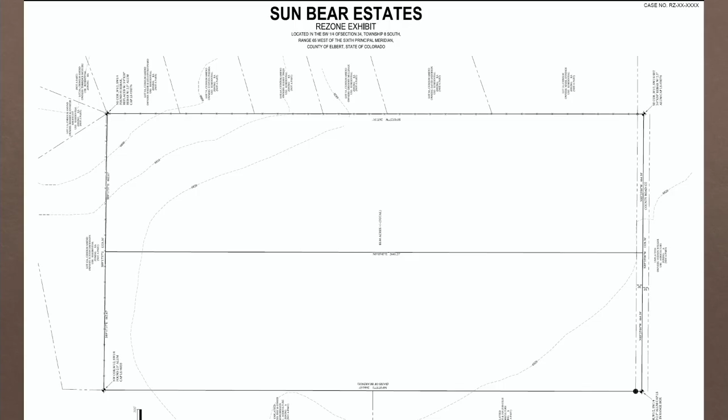So thank you for this one, and I'll move into the final and preliminary plat. Here's a look at the rezone area.

Now we'll dive into the final plat, FP-23-18837, and all of the initial background and details are the same as the previous presentation. Same process. These are occurring concurrently, the final plat and the rezone.

So a few key notes about the final plat. It's a rezone, obviously, from agriculture to residential agriculture. The lots here would be 10-acre lots, 8 10-acre lots. Access will be through a single private road named Imperial Point, located at County Road 122.

The existing land has no structures. The northern lots will have building envelopes because they do not meet the width requirement, so setbacks are basically pushed further back, in simpler terms.

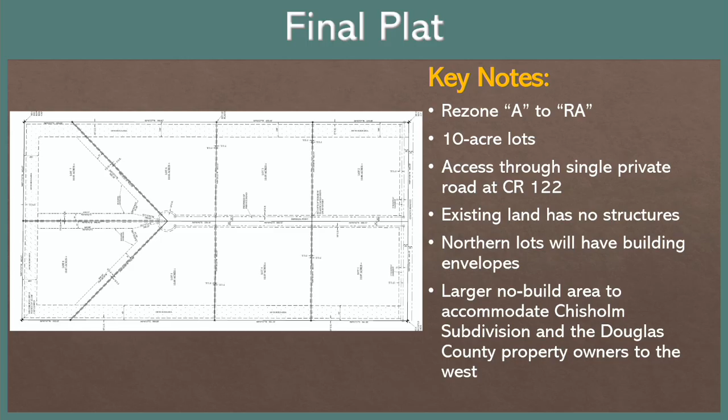And then there are larger no-build areas to accommodate the Chisholm subdivision and the Douglas County property owners to the west. In the Planning Commission meeting, there were some alterations to the final plat made to include a 100-foot buffer on the west side as well to accommodate the Douglas County residents, so buildings will be further from the existing residential and agriculture located in Douglas County as well.

For site access, there's a private road that's approximately 1,550 feet. It'll be 60 feet wide and end at a 100-foot diameter cul-de-sac. There's no ingress, egress on adjacent properties, and additional utility easements for Mountain View Electric are shown.

One provision: local roads leading to a cul-de-sac providing to lots between 1 and 20 acres should not be more than 1,320 feet. And in Article 1 of the enacting clauses, there's a variations and modifications provision that says the BOCC may authorize minor variations and or modifications from these regulations in cases where, due to either exceptional topographical conditions or other conditions peculiar to the site, an unnecessary hardship would be placed on the applicant.

Such variations or modifications shall not be granted if they are detrimental to the public good. And the conditions of any variation or modification shall be stated in writing in the meeting minutes of the Board of County Commissioners meeting. For this road length, going slightly longer at 1,550 versus 1,320, we got with the county engineer, road and bridge, and there were no objections to the slight variation in length for this subdivision.

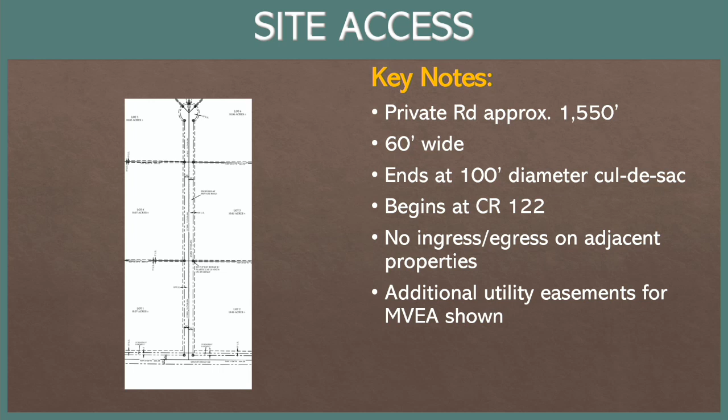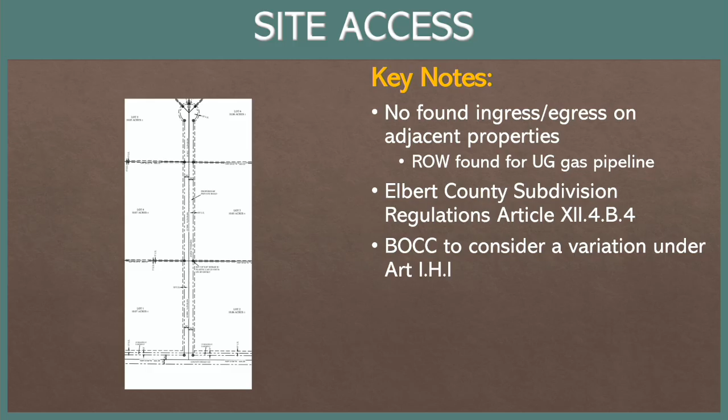So one note or condition would be for the Board of County Commissioners to consider a variation under Article 1H for a variation in road length. This also went through all the same referral agencies and acknowledged all questions or objections throughout the referral process.

So for final plats, Elbert County subdivision regulations list criteria for subdivision requests. So A, whether the subdivider has provided evidence for water supply that is sufficient and quality in accordance to applicable state laws. So the water source was deemed adequate by the Division of Water Resources. They received all approvals needed for the 8 proposed lots, and the Division of Water Resources indicated after the augmentation plan approval that the water supply was adequate.

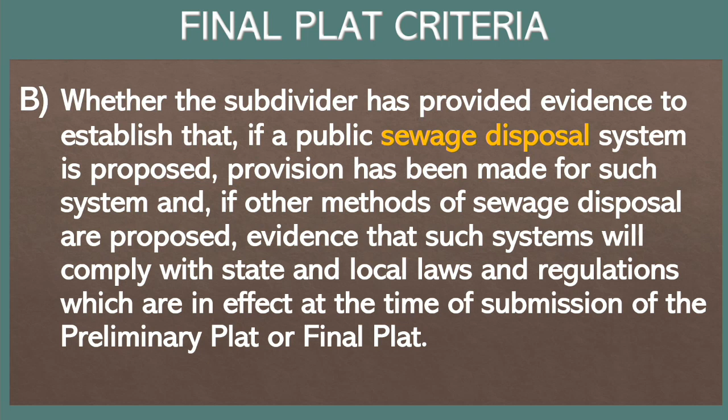And would not provide injury based on Elbert County Subdivision Regulations' 300-year water requirement. B, whether the subdivider has provided evidence to establish that public sewage disposal system is adequate for the preliminary and final plat. There is no central sewer system for this subdivision. Each individual lot will need on-site wastewater treatment systems or other recommended systems approved by Elbert County Public Health at the time of development. They'll need to submit the soil testing and go through the normal process for that.

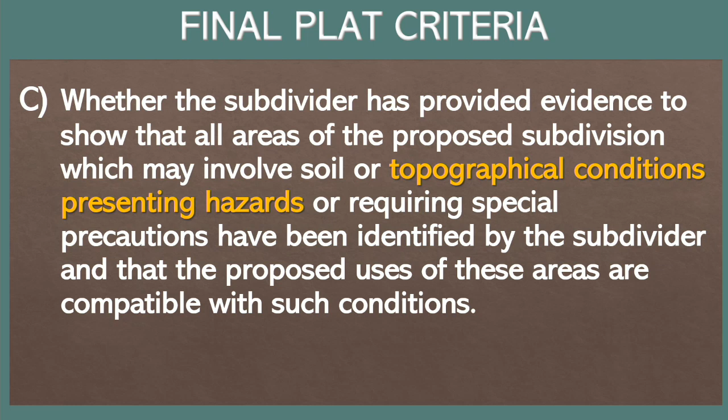C, whether the subdivider has provided evidence to show that all areas of the proposed subdivision which may involve soil or topographical conditions presenting hazards or requiring special precautions have been identified by the subdivider. The applicant provided all this information. Soil testing, of course, will be needed for sanitation approvals at the time of development for each lot.

And then finally, D, whether the application is following the requirements. The applicant has adequately addressed all concerns, and this application adheres to the zoning regulations and subdivision regulations. The only standard of concern regarding the roadway length is presented in this report for consideration and will be up for consideration by the Board of County Commissioners.

And for the comprehensive plan, E, the final criteria: one goal is for water, sewer, and waste disposal. New development shall conform to state laws covering domestic water supply and septic systems. And another goal in the comprehensive plan is that the county should coordinate planning and development review efforts with towns and applicable referral agencies to ensure integration and continuity. This was referred to Douglas County, and they had no objections either.

And then finally, for the natural resources topic area in our comprehensive plan, new development should minimize negative impacts to adjacent agricultural lands and designated open space. This will be subject to cash in lieu of open space to satisfy that requirement, and the applicant was even working on a dark sky provision to minimize their impact on surrounding agriculture and their neighbors.

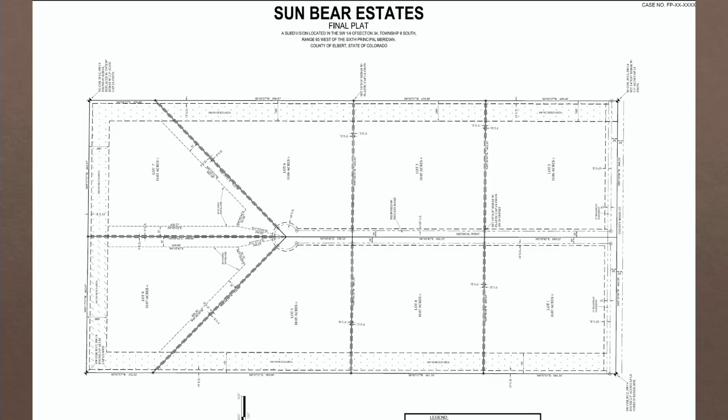Thank you, Commissioner. Thanks, Danny, for the presentation. I first want to introduce our team with Sun Bear Estates that we have today: Steve McAnally with IPA Development, owner and applicant, and Chris Cummins, private counsel.

Danny gave a great overview. I think the most important thing to mention again would be compatibility with the existing development north and east of the property—it's going to be zoned the same. We chose the zoning RA based on feedback we received at the community meeting. We also have buffers, as Danny mentioned, to accommodate the neighbors and their existing views of Pikes Peak, and additional buffers were requested from Douglas County residents, so we added those.

One item to add that was not mentioned is we did dedicate 15 feet to Elbert County for future roadway improvements south of the property, just north of County Road 122, which is a major collector in Elbert County's transportation plan. Danny did mention that this is going to be a dark sky community—these are requirements we're going to impose upon ourselves and the CC&Rs to mitigate light pollution.

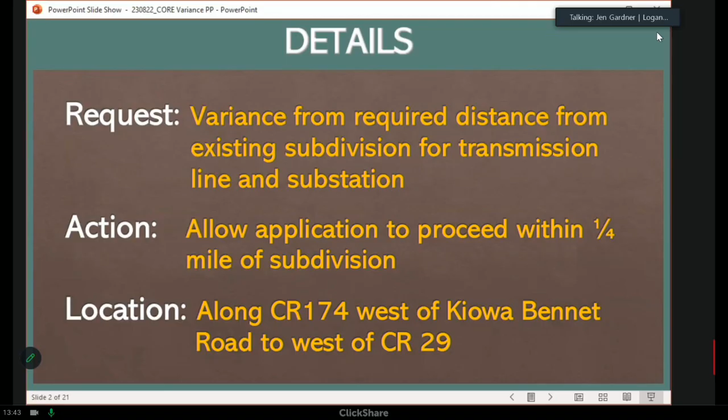The applicant is Core Electric Cooperative. There are multiple property owners involved in this long stretch of transmission line and substations. The application was submitted on June 19th of 2023. We went through a review process and a referral process, and we are here at this hearing today, August 23rd, 2023. The project was noticed in compliance with the zoning and subdivision regulations.

Just to highlight this encroachment that we are here for today, as you can see, the green is the subdivision buffered out a quarter mile. So that's showing distance a quarter mile from the existing subdivision, which, as you can see, overlaps with the Spring Valley substation. We asked the applicant to also add the black dashed line to show the impact of that substation in reverse, so we can see which parcels of that subdivision are actually affected by the quarter mile location.

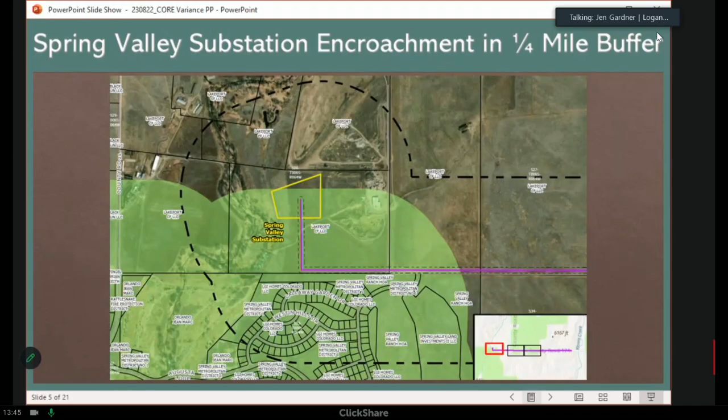Now, as you can see, the transmission line running along County Road 174 is that magenta or pink line. It is proposed to be located along the County Road 174 corridor on the south side of the road until you get to just west of County Road 29, where it will jump to the north side of the road. Again, you can see in green the area that's within a quarter mile of the subdivision, and the black dashed line is the quarter mile from the transmission line. So you can see these 6 residential parcels are affected.

Similarly, running a little bit further east down the road, we've got about, I believe, 13 residential lots in the Sun Country Meadows subdivision that would be affected by this quarter mile location.

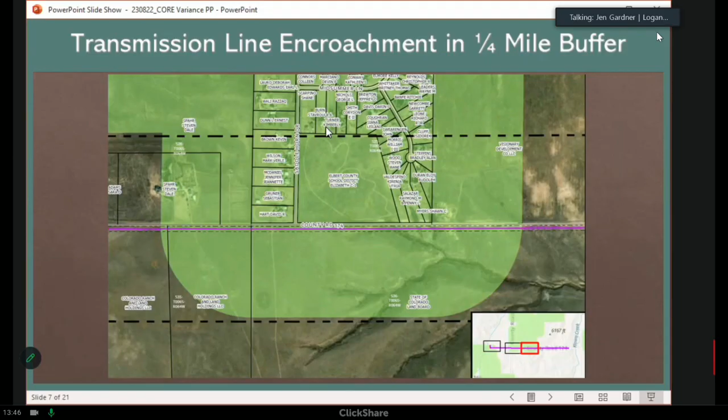As I stated earlier, this was sent out for referral per the zoning regulations requirements. We did hear back from 4 of the referral agencies. Colorado Parks and Wildlife sent a letter stating that the substation itself will cause some wildlife fragmentation, so wildlife moving through that area will now have to circulate around the substation. But they had no specific concerns with the application; they just wanted to make note of that and ensure the applicant was considering it in siting the substation, which they agreed they had been. Colorado Division of Water Resources, Rattlesnake Fire Protection District, and Elbert County Assessor's Office all reported back with no comments and no objection.

I'm going to run through the review criteria. As you're considering this application today, you'll want to consider the review criteria in the zoning regulations, Article 3J7, review criteria A through E.

Review criteria A states that by reason of exceptional narrowness, shallowness, or shape of a specific piece of property, topographic conditions, or other extraordinary and exceptional situation or condition of the property, the strict application of the regulation would result in peculiar and undue practical difficulties for, or peculiar and unnecessary hardship on, the owner of the property. The applicant reports that exceptional conditions exist due to the extent of the existing subdivisions in the area that the project is designed to serve.

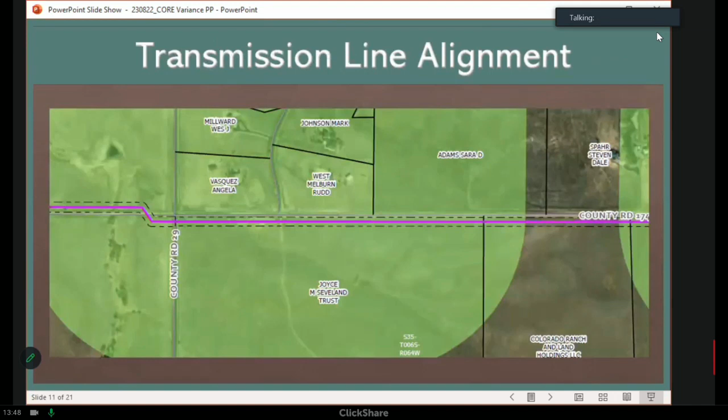Just wanted to show that alignment again. Item B: the extraordinary and exceptional situation or condition on the property stated as the reason for the proposed variance is not self-imposed. The applicant has stated that the project is necessary to provide additional electric capacity to existing and proposed development in the area of the project. So the conditions requiring this variance are not self-imposed.

Item C: the proposed variance complies with the purpose and intent of the standard to be varied and generally observes the spirit of the zoning regulations. The project has been sited to minimize overall impact by locating the transmission line in an existing road corridor and setting the substation back from County Road 174 to reduce visual impact.

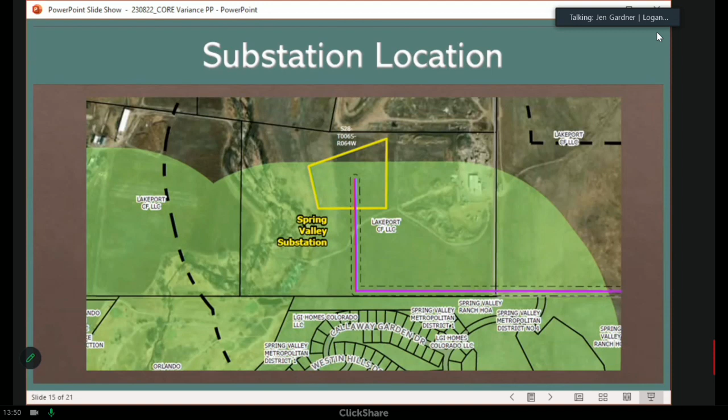I wanted to highlight, this is in the applicant's packet, that they have been working with the potential developer of this site. There is a potential development in this general location that they've been working with to accommodate this substation in conjunction with some other potential commercial and residential development.

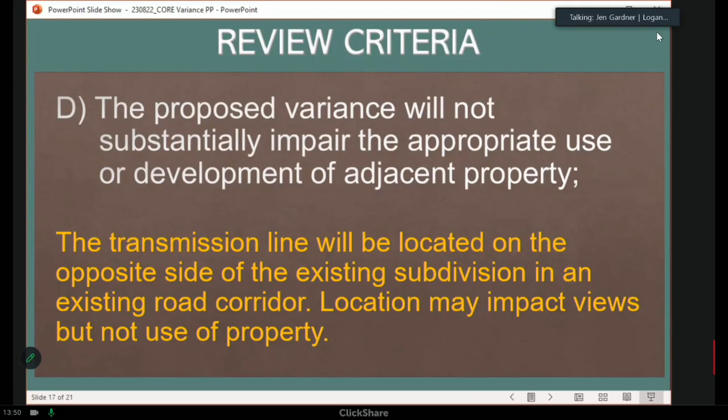Item D: the proposed variance will not substantially impair the appropriate use or development of adjacent property. As we just said, the Spring Valley substation was selected to allow for commercial development of adjacent property. A variance for part of the substation site will not impair their development. Part 2 of this is the transmission line will be located on the opposite side of the existing subdivision in an existing road corridor, as we've stated before. The location may impact some views slightly, but will not impact overall use of those properties.

Finally, item E: the proposed variance is the minimum variance that will afford relief with the least modification possible of the zoning regulations. The applicant has stated that the substation is currently sited at the outer extent of the available space on the proposed property. In order to route the transmission line in the existing roadway for minimal visual and other impacts, and to tie into the proposed substation, it is also at the minimum required variance.

So with that, the Community and Economic Development Department does recommend approval of this variance application to exempt the project from the quarter-mile distance requirement from the existing subdivision.

There are a couple of conditions. The applicant will be required to remove the public hearing signs within 7 days of a decision by the Board of Adjustment. The variance shall become effective only once all fees are paid and the variance resolution is recorded. Recordation shall be within 180 days of the BOA approval. Formal applications shall be submitted for a minor 1041 application, a special use review, minor plat, and site development plan prior to full project approval.

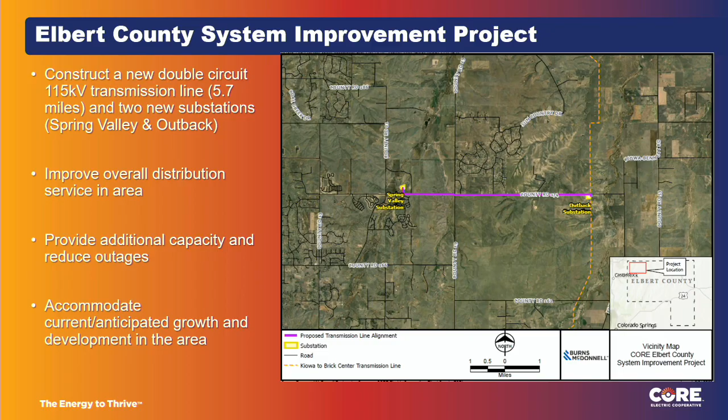I wanted to go over a brief timeline of what I call major permitting milestones for the project. Attempts have been made to permit this project back in 2010 and 2011. It was coupled with the Kiowa Brick Center project at that time. Both of those were denied.

So restarting in September 2021, there was an Elbert County Board of County Commissioners meeting where the project was introduced again as separate from Kiowa Brick Center. We introduced the study area, various preliminary substation locations, preliminary routes, and discussed the substation siting with the Deer Valley, or what was to become Morstead, development.

The project was presented again in June of 2022 to hone in on those substation locations, to discuss some of the preliminary routes. At that time there were 4, and to discuss the most recent siting in the Deer Valley or Morstead development.

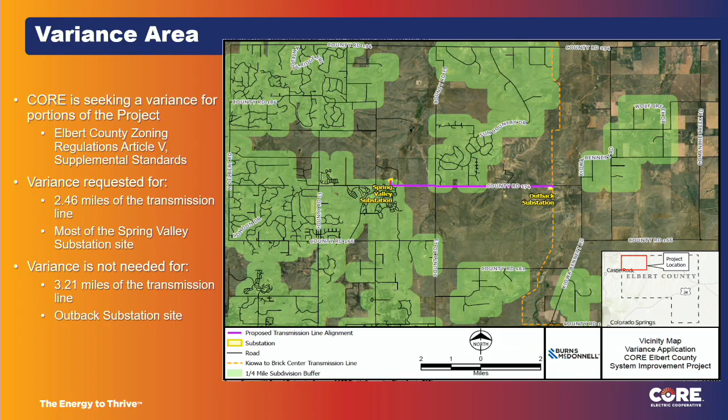CORE did consider alternatives and conducted a routing and siting study, which was completed for multiple substation sites and 4 routes. The Spring Valley substation location was based on accommodation from the Morstead development. However, this accommodation was limited to siting the substation within one of 3 areas designated for commercial mixed use, which collectively accounted for only 9% of the proposed subdivision.

Elbert County staff requested that substations should not be placed at intersections, eliminating 2 of the 3 commercial mixed-use areas. It was also requested by Elbert County staff to shift the substation to the north end of the property to allow potential future commercial development to the south along the proposed extension of County Road 174. This shifting will also allow for commercial development to screen the substation from 174.

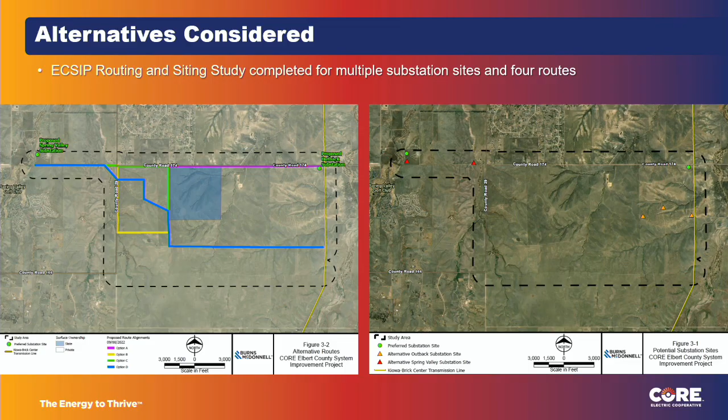As Jennifer referenced in her presentation, we believe the project, the Elbert County System Improvement Project, meets the Elbert County variance review criteria. It's difficult to avoid areas within a quarter-mile of an existing substation or subdivisions due to constraints, and the project was sited overall to minimize overall visual impact.

As I mentioned, the Spring Valley substation was set back from the future extension of County Road 174 and will be screened by future commercial development. The transmission line is co-located in an existing road corridor, and the transmission line is located on the opposite side of the road from the existing Spring Valley, T&M Ranches, and Sun Country Meadows subdivisions.